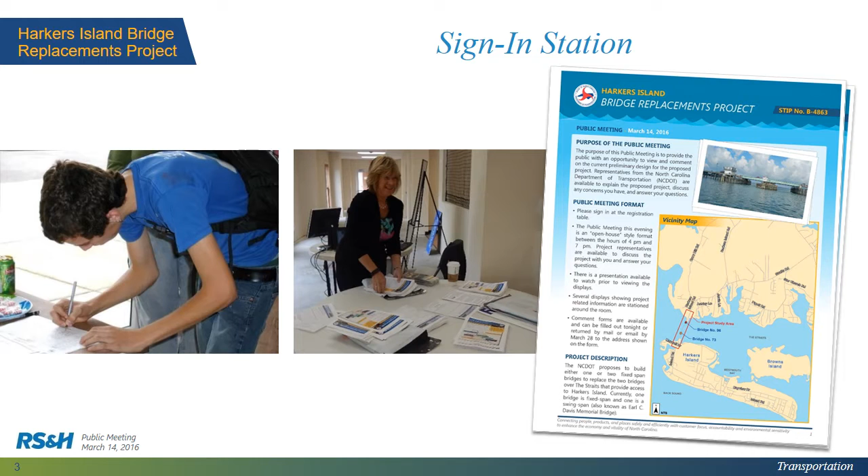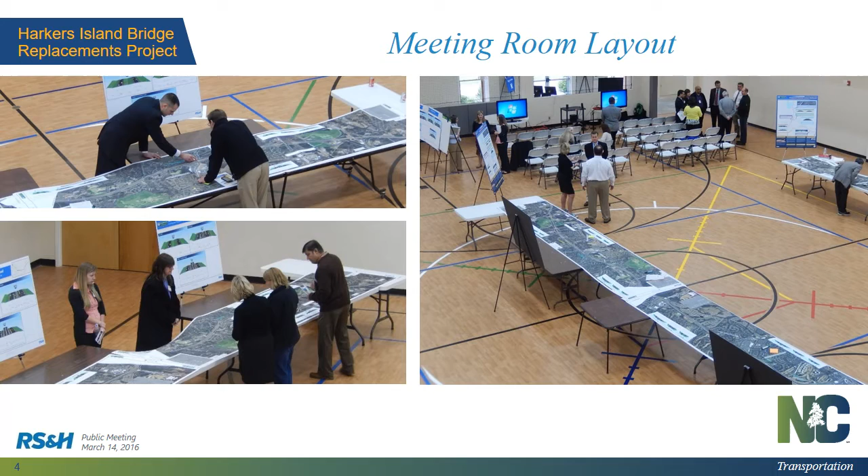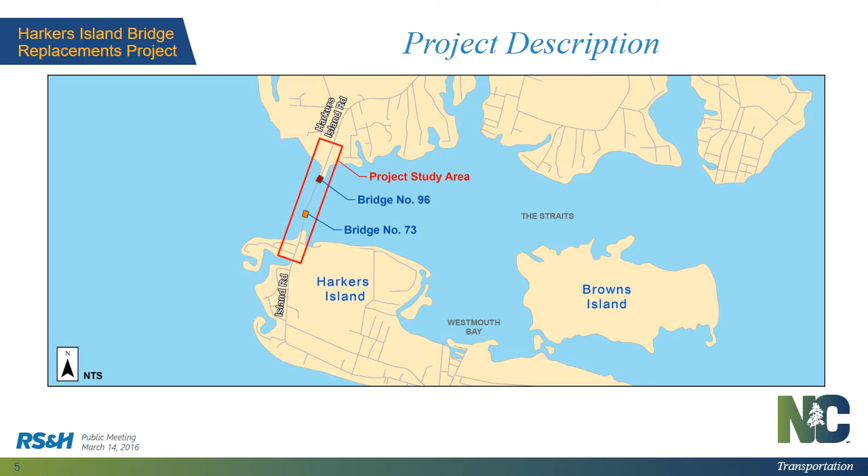NCDOT proposes to replace the existing Harkers Island bridges, bridge number 73 and number 96, on Harkers Island Road, Secondary Road 1332-1335 in Carteret County. Replacement of bridge number 73, also known as Earl C. Davis Memorial Bridge, means removing the existing movable swing span bridge, and replacement of bridge number 96 means the removal of the existing fixed span bridge.

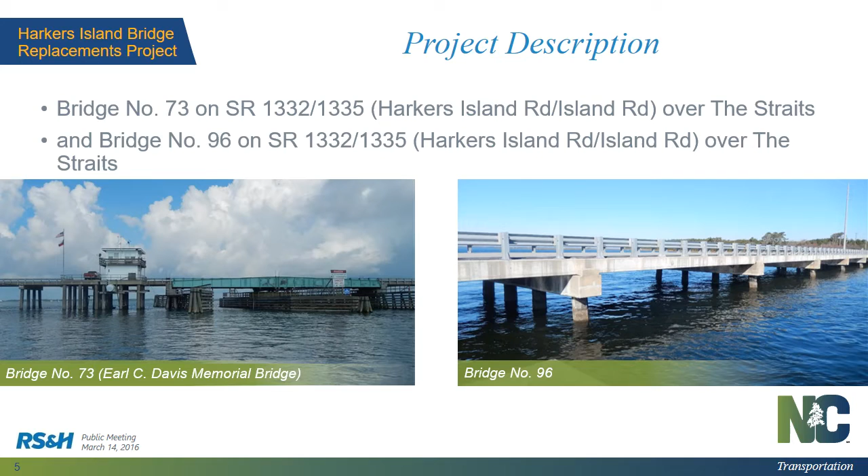Bridge number 73 is a swing span bridge that was built in 1969 to replace the wooden structure that was originally constructed in 1941. The current bridge has two 12-foot lanes, one in each direction, with a 2.5-foot shoulder on each side. In 2012, a bridge inspection determined that this bridge was structurally deficient due to the age and poor condition of the existing bridge structure, receiving a rating of 29 out of 100.

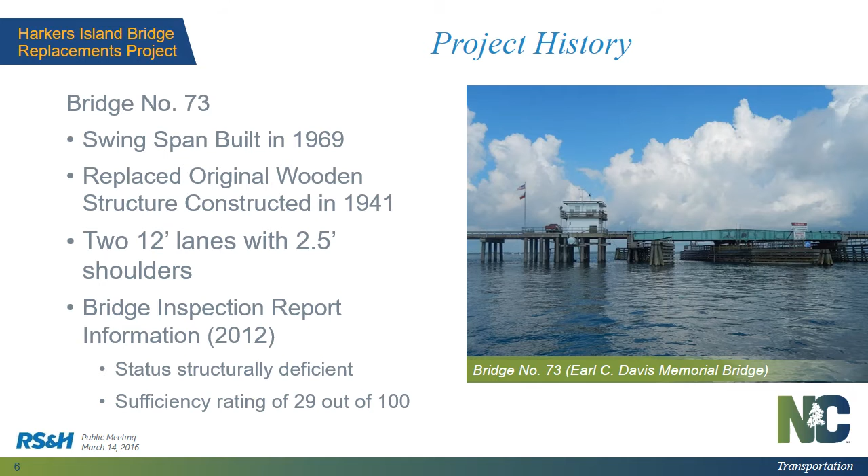Bridge number 96 is a fixed span bridge that was built in 1970. It has two 12-foot lanes, one in each direction, with a total horizontal width of 26 feet. In 2013, a bridge inspection determined that bridge number 96 was functionally obsolete based on the narrow width of the existing bridge. It received a rating of 47 out of 100.

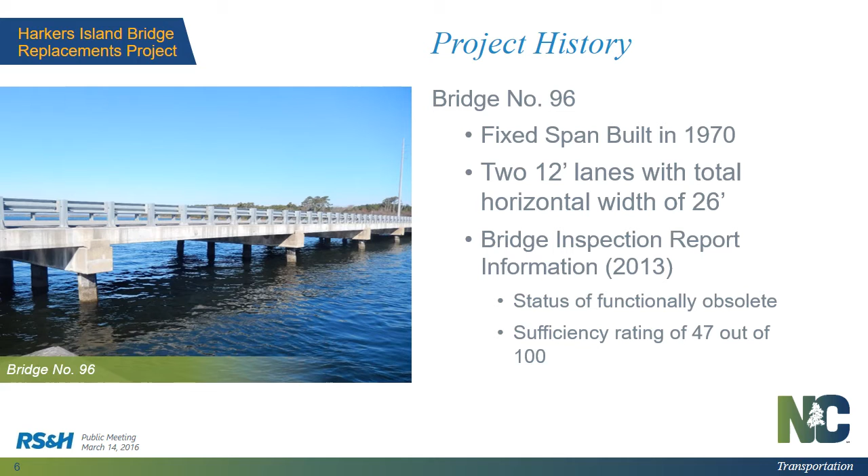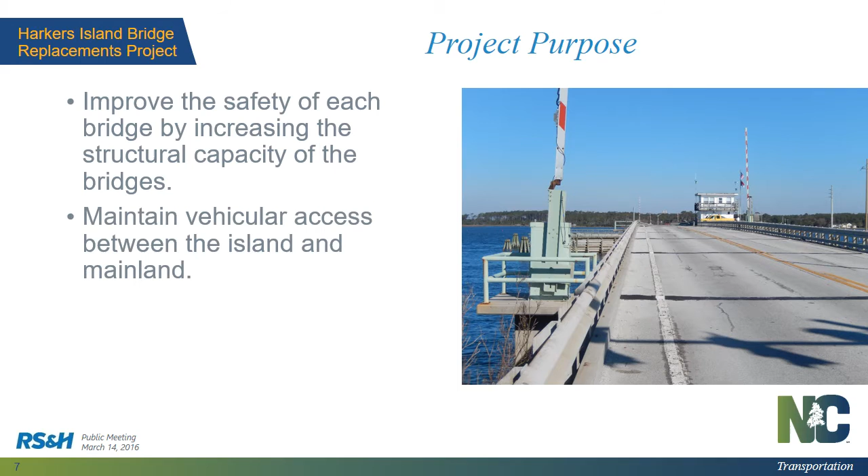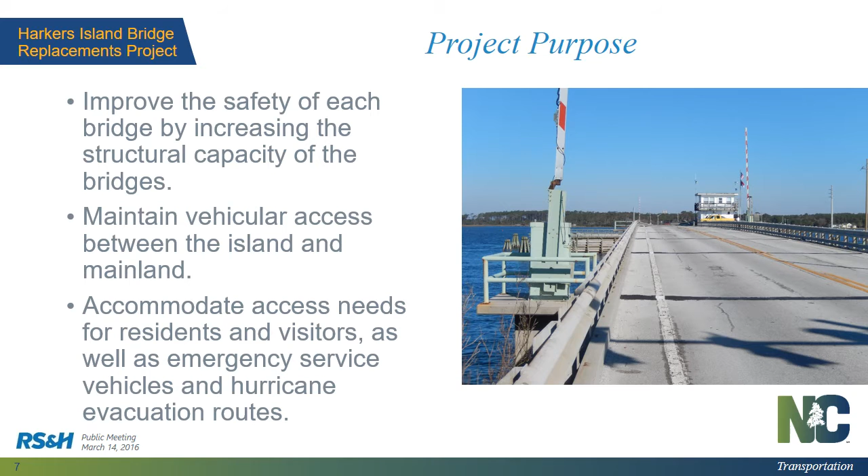The purpose of this project is to improve the safety of each bridge by increasing the structural capacity of the bridges, maintain vehicular access between the island and the mainland, and accommodate access needs for residents and visitors, as well as emergency service vehicles and hurricane evacuation routes. Currently, this segment of Harkers Island Road carries approximately 3,300 vehicles per day.

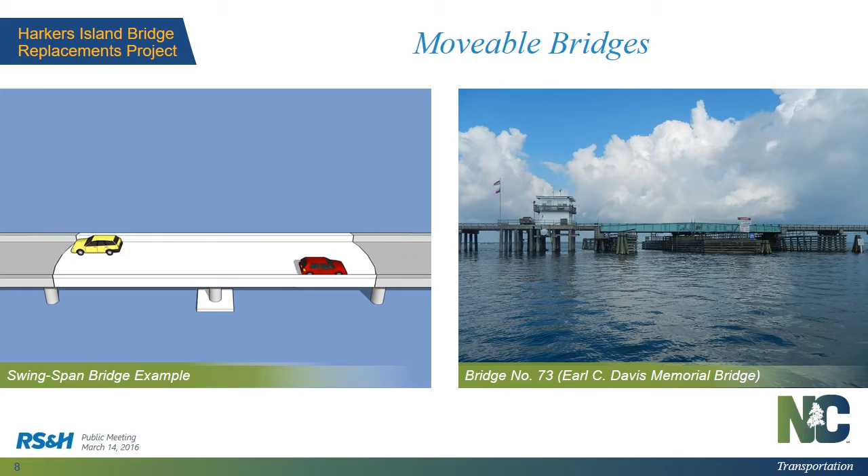Movable bridges are ones in which portions of the bridge move. When closed, these bridges provide a lower clearance between the water and the bridge, allowing only smaller boats to pass underneath. When opened, the bridge provides space for larger boat traffic to cross. Typically, movable bridges include swing span bridges, vertical lift bridges, and bascule bridges. The existing Harkers Island Bridge, bridge number 73, is an example of a swing span bridge.

Fixed span bridges are fixed in place with no movable spans. Typically, fixed span bridges are built much higher than movable bridges, providing vertical clearance over waterways to allow for larger boat traffic to pass beneath. Currently, there are only a handful of movable bridges left in North Carolina. In general, it is the NCDOT policy to replace existing movable bridges with fixed span bridges where possible.

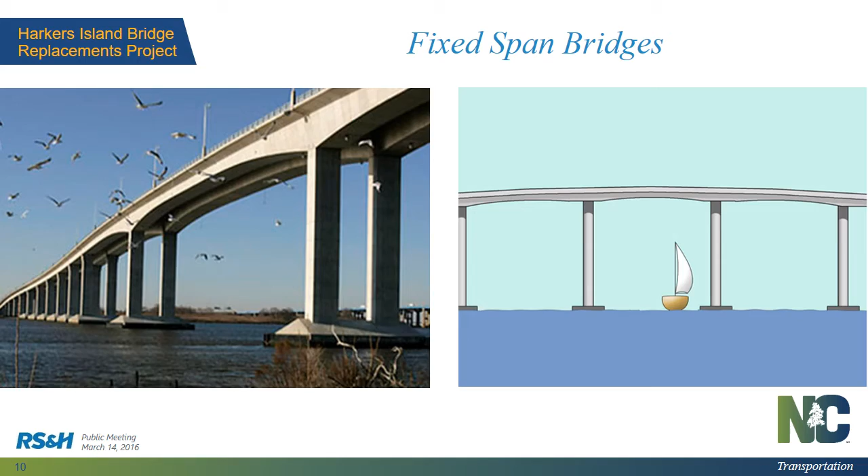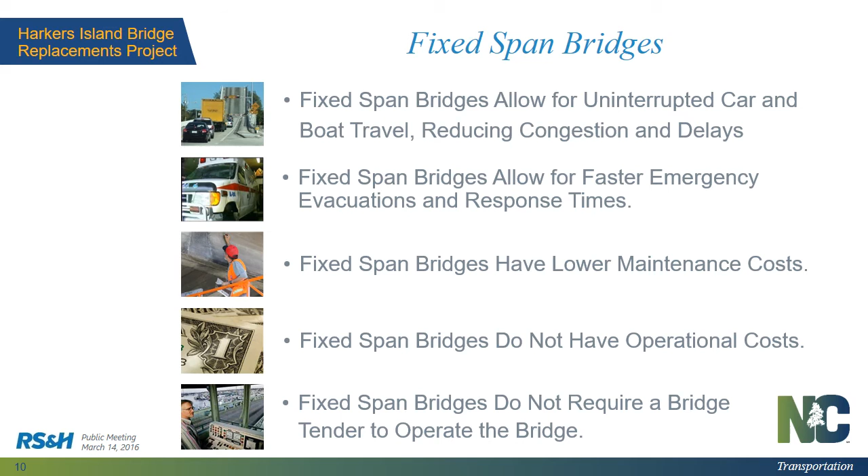NCDOT has adopted this policy for the following reasons. Fixed span bridges allow for uninterrupted car and boat travel, reducing congestion and delays; allow for faster emergency evacuations and response times for all modes of transportation; have lower maintenance costs; do not have operational costs; and do not require a bridge tender to operate the bridge.

Within the project study area, there are human resources present that have the potential to be impacted by the project. Those resources are Harkers Island Beach Access west of the island landing, Straits Fishing Pier east of the center landing between the two bridges, and Straits Boat Landing Access Area, west of the mainland landing.

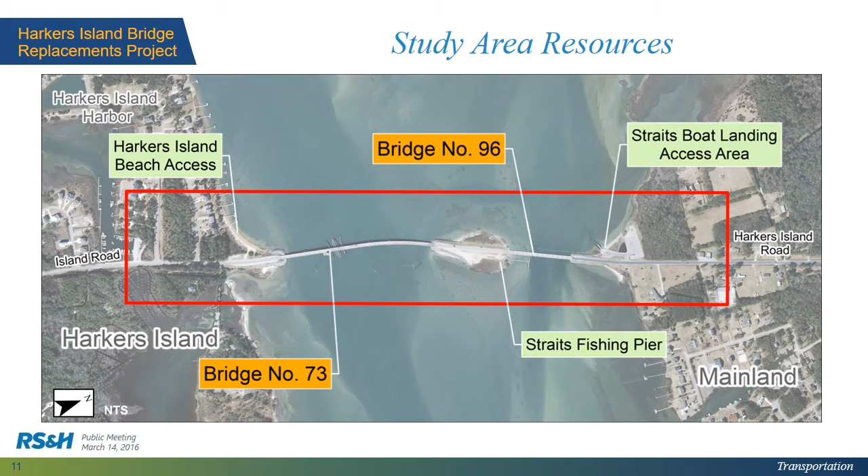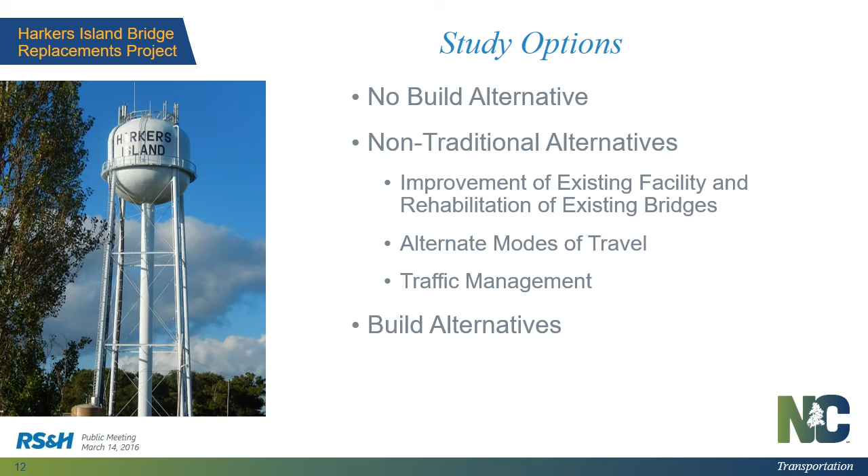We are also evaluating natural environmental resources in the study area, including wetlands and submerged aquatic vegetation. The project team is evaluating various alternatives for this project, including a no-build alternative, non-traditional alternatives, and 4 build alternatives. The no-build and non-traditional alternatives do not meet the purpose and need of the project and have therefore been removed from further analysis. The 4 build alternatives remaining meet the purpose and need and are being analyzed for potential impacts to the human and natural environments.

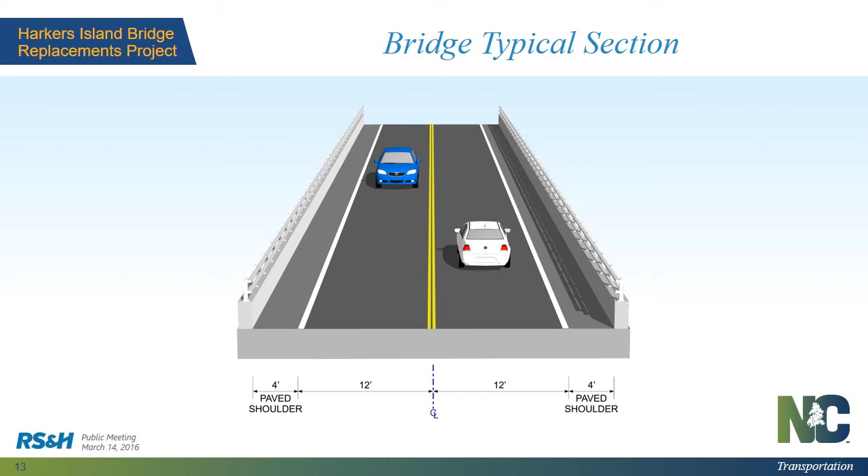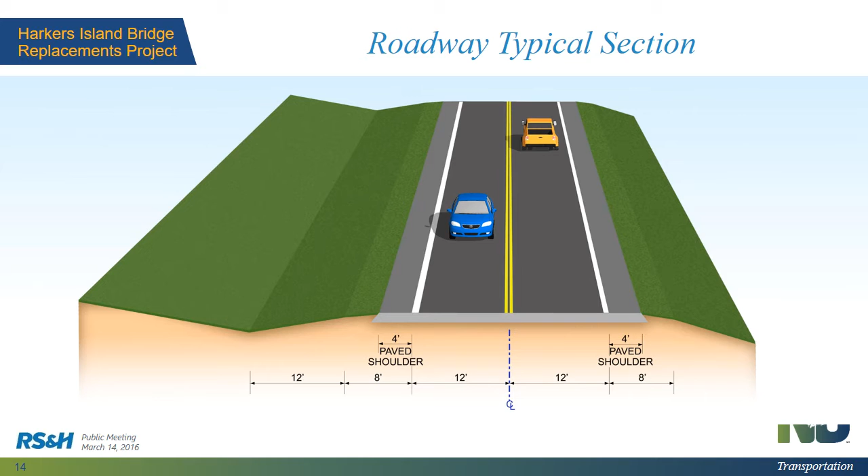For all build alternatives, the typical section of each bridge will provide 2 12-foot travel lanes, 1 in each direction, and 4-foot paved shoulders on each side. The roadway typical section for all build alternatives will provide 12-foot travel lanes, 1 in each direction, and 4-foot paved shoulders on each side of the road.

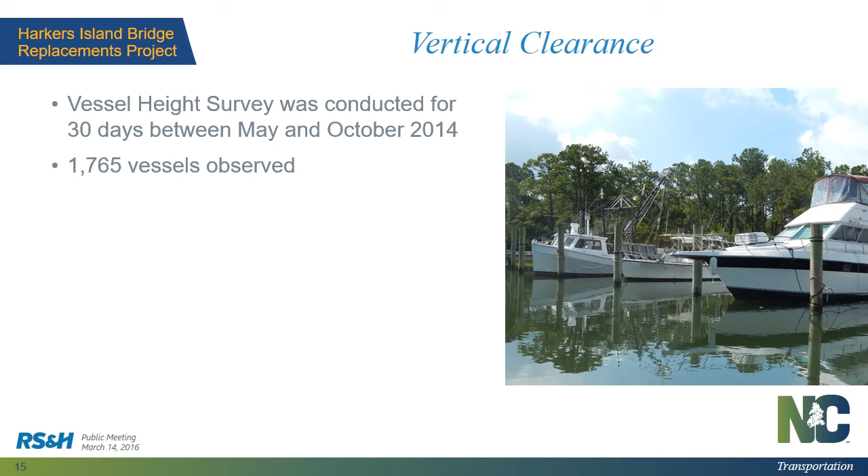A vessel height survey was conducted for this project for 30 days over a 6-month period between May and October 2014 in order to obtain height and frequency information for vessels passing through the existing swing span bridge. During the survey, a total of 1,765 vessels were observed, with an average of 3.4 vessels per day, requiring an average of 2.9 bridge openings per day. 99.9% of the vessels observed were 40 feet in height or less.

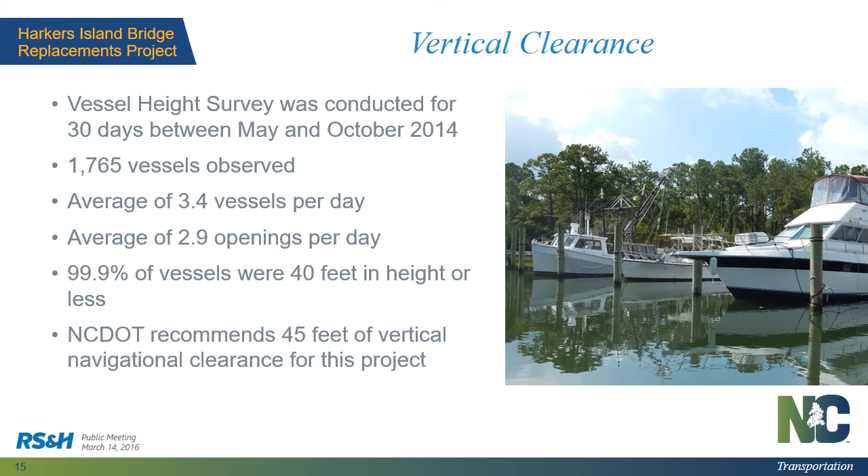Based on the results of the vessel height survey, NCDOT is recommending 45 feet of vertical navigational clearance for each alternative. Alternative 1 would include 2 fixed span bridges, each located to the west of the existing bridges, touching down on the center island. Alternative 2 would include 2 fixed span bridges, one located to the west of bridge number 73 and one located to the east of bridge number 96, touching down on the center island.

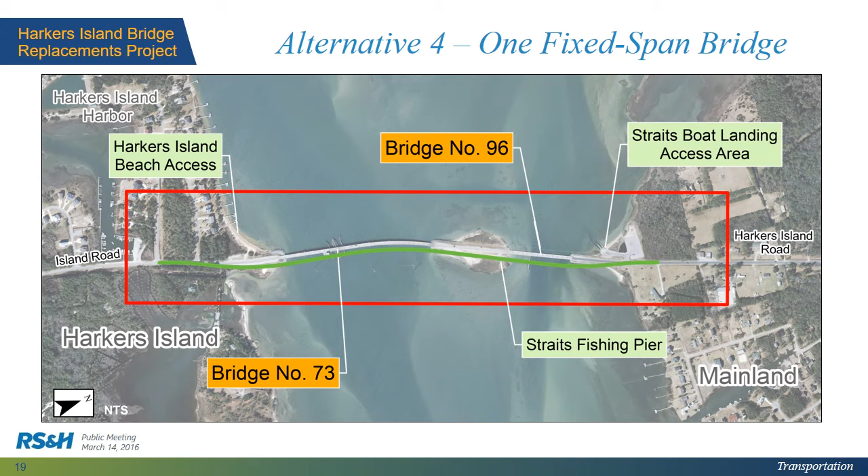Alternative 3 would include 2 fixed span bridges, each located to the east of the existing bridges, touching down on the center island. Alternative 4 would include 1 fixed span bridge located to the east of the existing bridges. The center island would not have a roadway connection. For the Harkers Island beach access, alternatives 1 and 2 would result in change in access, providing a pathway beneath the new bridge with a clearance of approximately 12 feet. Alternatives 3 and 4 would not change the access to the beach.

For the Straits Fishing Pier, located on the center island between the 2 existing bridges, alternatives 1, 2, and 4 would have no access. Alternative 3 would have a change in access and would require the pier to be moved to the other side of the road. For the Straits Boat Landing Access Area, alternatives 1 and 2 would have no change, whereas alternatives 3 and 4 would have a slight change to the driveway location.

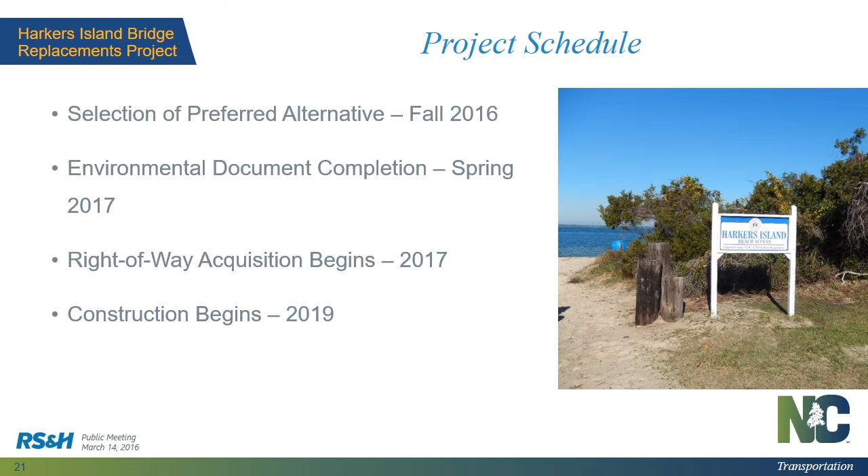Following this meeting, a preferred alternative will be selected based on public comments, suggestions, and sound engineering analysis. The environmental document that will provide study findings, evaluations, and recommendations in compliance with the National Environmental Policy Act is currently scheduled to be complete in early 2017. Right-of-way acquisitions are expected to begin in 2017, and construction is anticipated to start in 2019. During construction, the existing bridge will remain open to traffic with short-term lane closures as needed.

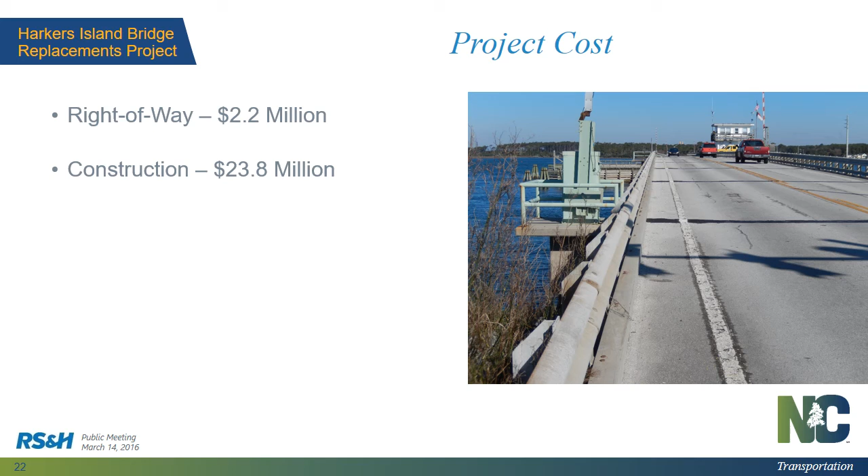The total estimated cost for this project is $26 million, including $2.2 million for right-of-way and $23.8 million for project construction. This is subject to change based on the alternative selected.

We encourage you to review the mapping provided at this meeting and share your opinions with the NCDOT representatives and/or fill out the comment forms provided. You may drop your comment form in the box provided tonight or mail or email it following the meeting. All comments are requested by March 28th. At any time following this public meeting, please feel free to reach out to the project team to ask questions and provide feedback. Project contact information is provided in the handout and also on the public meeting website. Your input is an important part of the project development process.